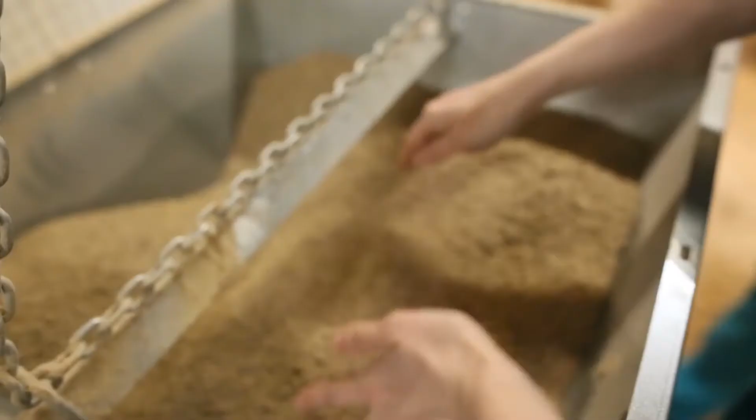Well, some 27 years ago, I was working in the Tumbarumba Batlow area in New South Wales, a well-known fruit growing area with orchards everywhere. I noticed at that time there was a lot of waste. There was waste left on the trees, there was waste on the ground, and there was waste in the processing facilities. I thought at that time I would be able to convert that waste into a poultry feed or a pig feed. Unfortunately, waste and materials like that weren't popular to have recycled at that time.

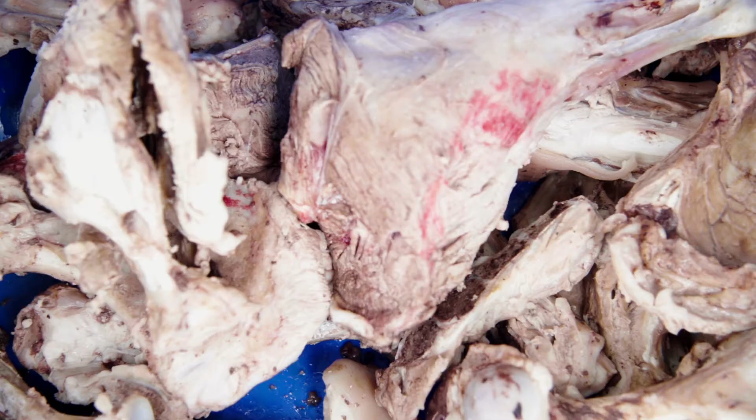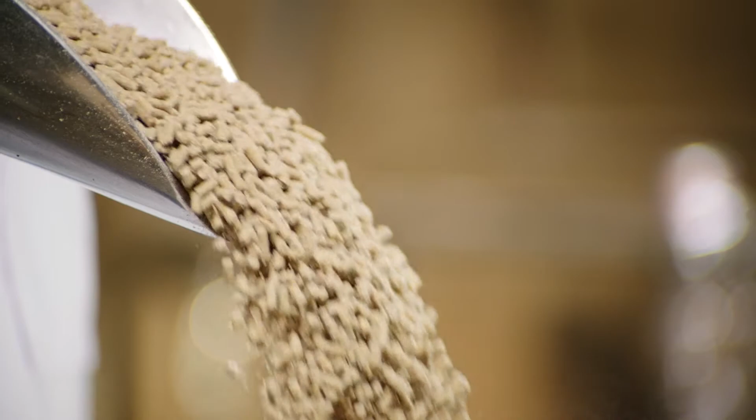27 years later, recycling is a major issue and everyone is interested in recycling. So I was able to expand that original idea 27 years ago into recycling all food waste, taking food waste from hospitals, retirement villages, cafes, restaurants, hotels, everywhere where food waste is produced as a byproduct. In fact, 30% of all food that's produced is never consumed. So the idea is to take that waste and convert it into valuable products such as poultry feed and liquid fertiliser.

How do we turn food waste into food? A pilot facility has been designed to enable the development and fine-tuning of processing various food waste from different sources, such as hospital, educational, and restaurant food waste, fruit and vegetables, or higher protein sources such as meat byproducts. Unless you're part of the solution, you are really part of the problem. And Food Recycle is a company that's going to provide a solution for Australia to overcome the food waste problem and which can be applied globally.

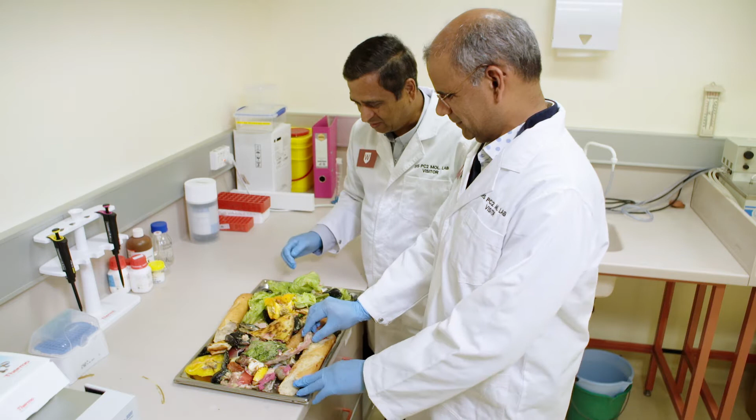Yeah, this particular project, we want to do a small laboratory scale trial before we do the large scale pilot trial. Collecting a few different sources of waste material, we went through the whole process and determined the nutritional value to see whether we can incorporate those into a feed formulation. The process involves collecting the material from different sources, going through a heat treatment to make sure that we destroy all microorganisms, and drying the product in the most efficient way. And then we can grind the product and that becomes a source of feed ingredient, and we can mix in different ratios depending on the final formulation we want.

The full-scale facility will include the key process steps in the pilot facility. The containers are modular in design. Depending on product characteristics, process steps can be interchanged. So my initial skepticism fortunately has turned into optimism and enthusiasm, because I've seen the process in reality. I've seen the science going behind it, I've seen the engineering behind it, and I've seen the intelligence and the expertise that Norm's brought together to be able to bring this to fruition. I really think there is quite a significant opportunity for Food Recycle to become a relevant, valid part of the chicken feed industry.

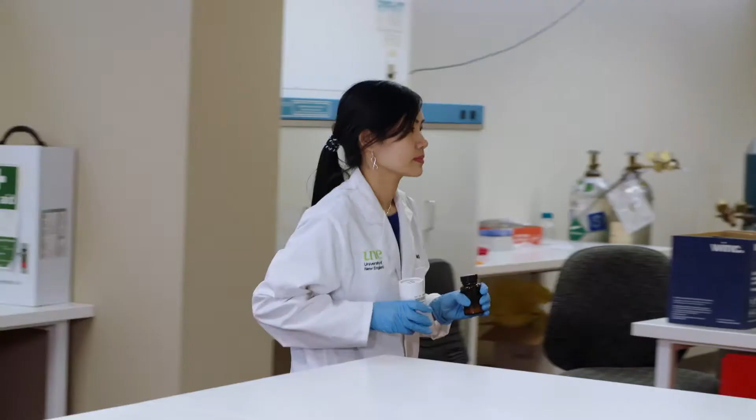A chicken needs about 50 different nutrients, and among those, about half would be trace elements and vitamins, and those are normally added as a vitamin mineral premix to the feed, so we don't really worry too much about those. The ones that we do worry about would be the energy content. Energy comes from carbohydrates and fat, and then the amino acids, which come from protein.

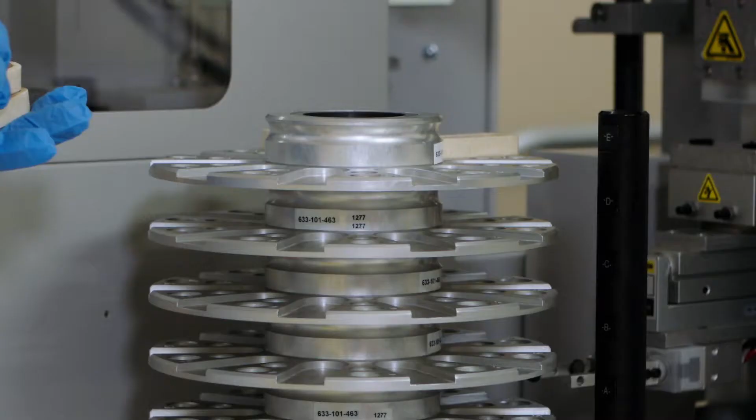Once we have the nutrient analyses completed of all the different waste streams, then we can take that information, put it into a formulation program, and blend them together to make an optimum poultry feed that may require additions of small amounts of other materials. And then we'll also be able to get an idea of the value of each of the different waste streams relative to the price of other ingredients in the marketplace.

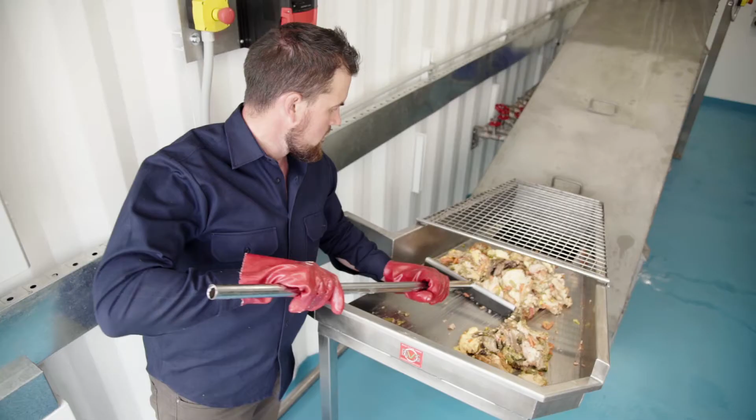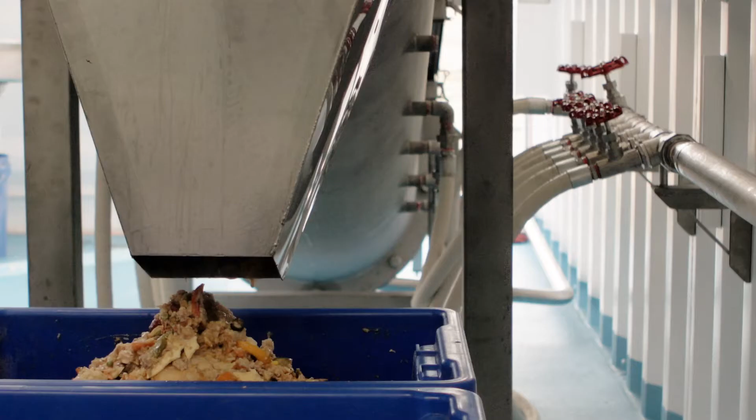Container 1 is the heat treatment step, comprising a direct steam-injected screw conveyor. Killing the microbes is achieved via a combination of time and temperature. Steam is used in this case as microbes are more easily deactivated in wet conditions.

It's a matter of going to all the different state authorities, finding out what their requirements are and making sure the process covers off on all of those. I must say though that with the various biosecurity authorities around the country, there's been a lot of goodwill. People all think that this is a good idea. We still need to do some contaminant monitoring, but we're well down the path to having all that covered.

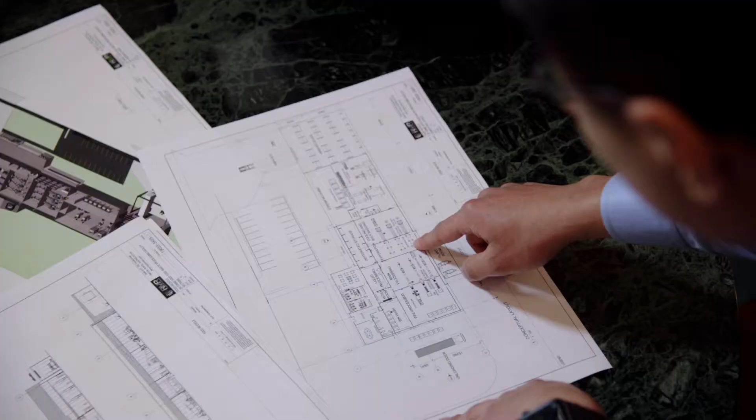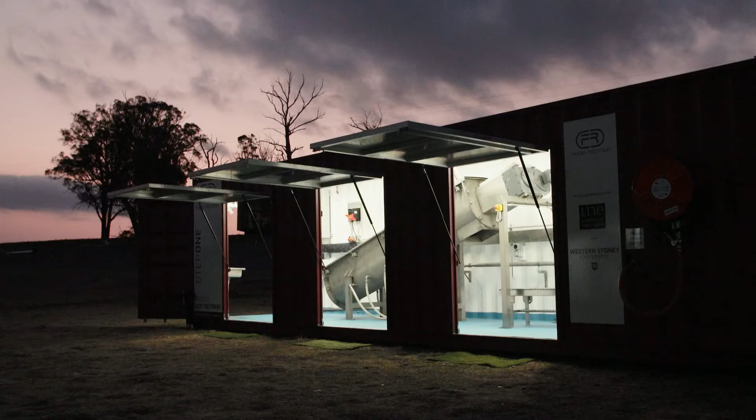RMR process, our business is set up specifically to design and build food manufacturing facilities. When the Food Recycle project came to us, we took a look at what they were trying to achieve and what outcomes they wanted from it. And we just thought it tied beautifully into our own business ethos of sustainability and building food safe, clean design processes, and particularly taking the food waste and converting it into something that's of high value and something that's meaningful and useful. So this project was a perfect fit for our company.

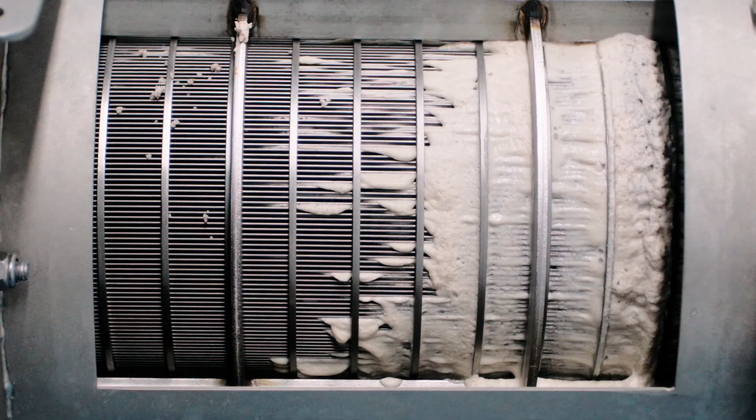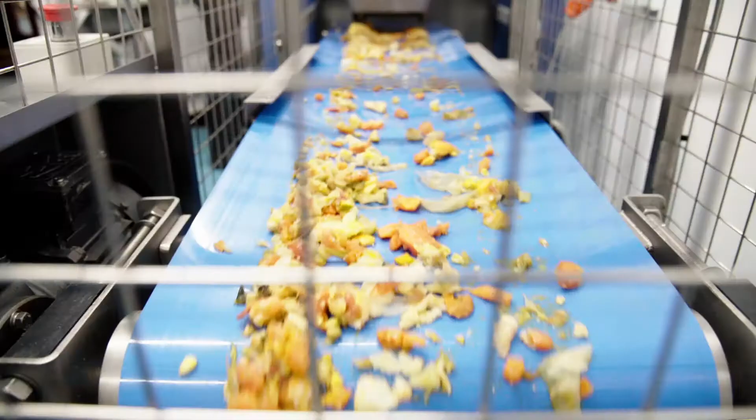Having a lot of years of experience in the pet food industry and pet food manufacturing, we found that could tie in, we could bring a lot of that knowledge, know-how, but also a lot of our networks, people that are experienced in all the different facets and areas of the process steps.

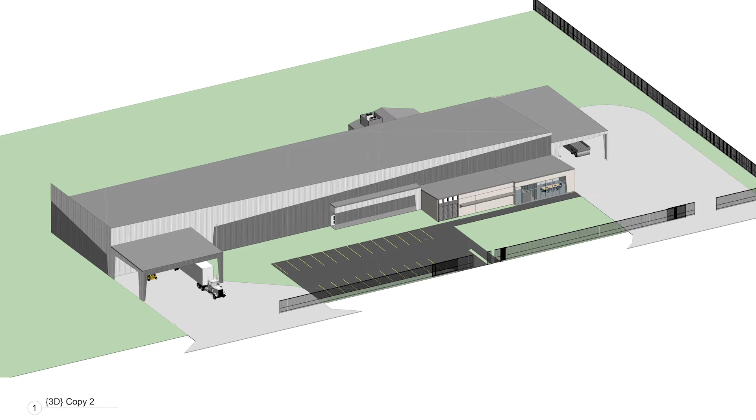Scalability has always been an inherent focus within the process design. What that means is that the throughputs can be increased according to requirements so that the facility is future-proofed, but in a way that makes sense to economies of scale so that capital cost can be protected. So we've designed a full-scale facility that can process up to 3.5 tonnes an hour of food waste at the in-feed, with 3 main processing lines, each capable of processing a variety of food waste streams.

The key is to look at the prospective locations of the facilities and to understand the volumes of waste and the types of waste that are being produced so that we can tailor a solution that makes sense to the location economically.

During my time in government, we looked to support projects that involved innovation, projects that were good for the environment, and projects that delivered economic benefits to our state. And certainly Food Recycle ticks all of those boxes. So it's great to be on the board of this company. I believe this company has enormous potential, not just for Australia, but globally.

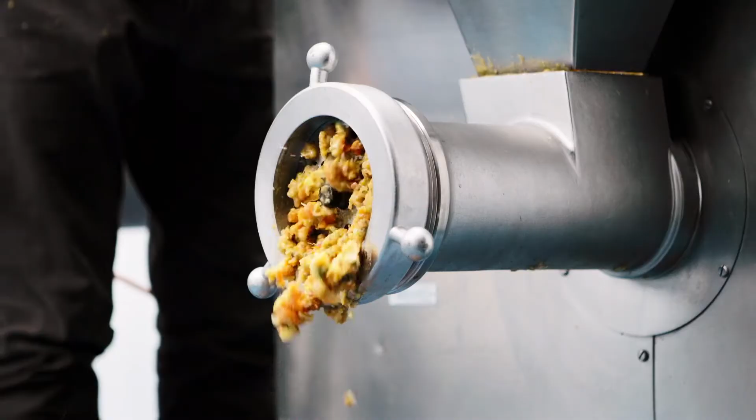Container 2 contains the maceration and dewatering step. Reducing particle size aids in increasing surface area for more efficient dehydration. It also aids heat penetration to the core of the particle.

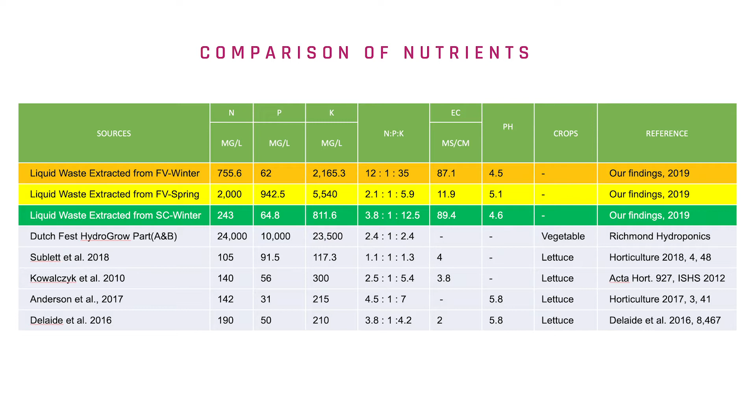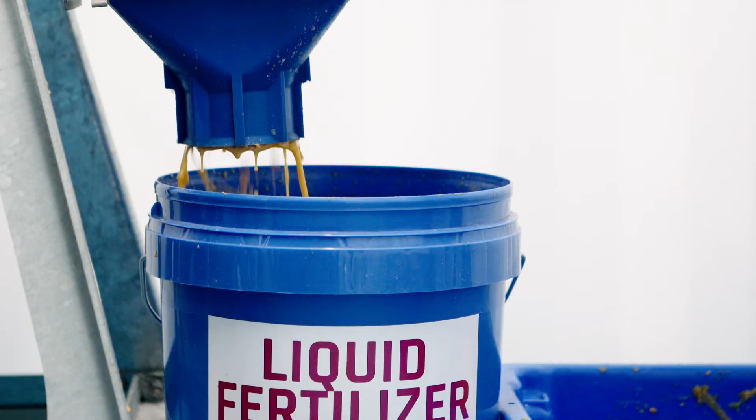When we were working on proof of concept studies to get chicken feed from food waste, we realized that there is a liquid extract which contained high concentrations of nitrogen, phosphorus and potassium. So we realized that this is the added benefit from the process, and we thought this could be a very good value as a fertilizer for plants because it has got all the essential nutrients which are needed for plants' growth.

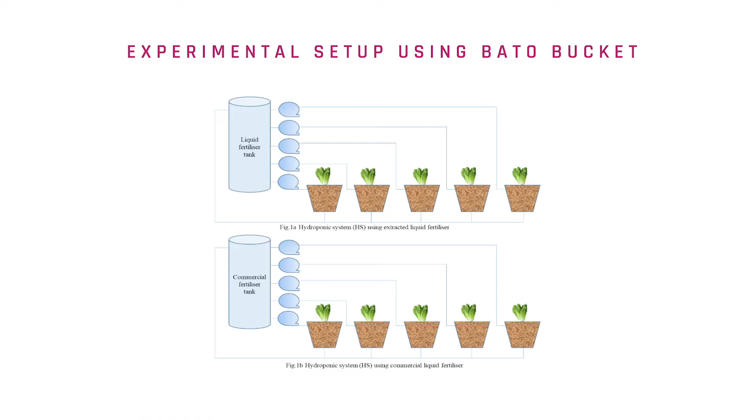So we were working on proof of concept studies to bring the concentrations of all the nutrients in the liquid extract at par with commercial fertilizers. We are doing proof of concept studies to determine the value of this liquid fertilizer for growing hydroponics, lettuce, tomatoes and cucumber.

With the concept around value-adding waste, what's happened is we've been able to refine that waste stream, so we've been able to look at it at a more micro level. Historically, we've just collected all of this and we've called it waste and we've taken it off to the landfill. Now all of a sudden people are seeing value-add in parts of that waste stream, so that's allowed us to break the waste stream up, and to break that waste stream up we have to have multiple chambers in the vehicles and multiple bins to collect the different waste streams.

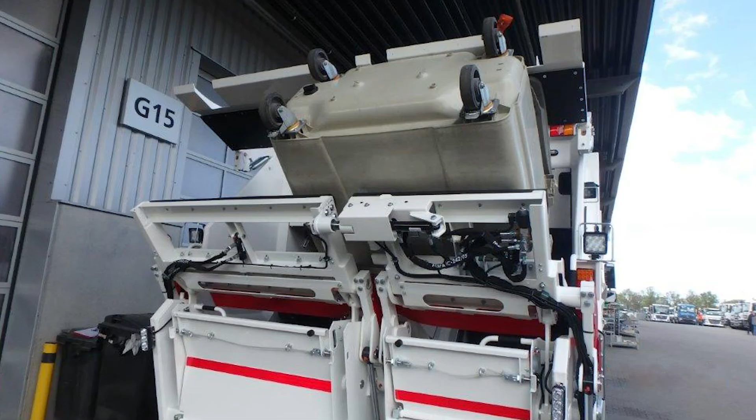We can also turn some of those waste streams that might have historically had a low value, all of a sudden value add them into something like extraction for energy, and then that leads us back to our circular economy and allows us to use waste to drive our vehicles.

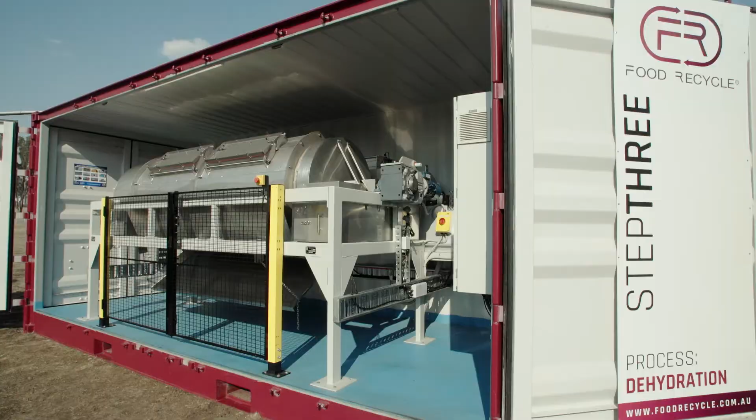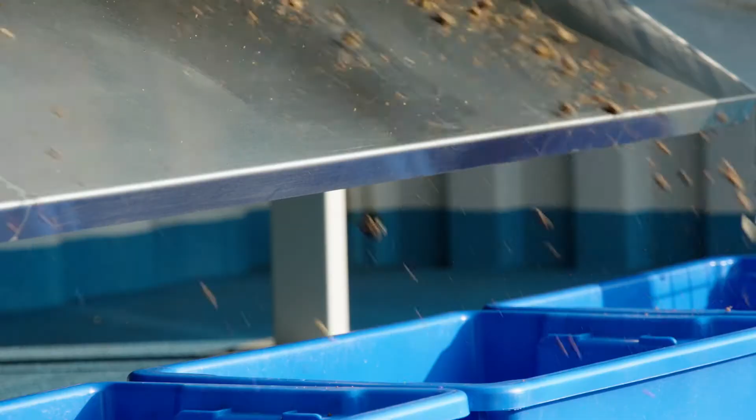Container 3 is the dehydration container. The pilot facility utilises a direct heat rotary drum dryer. Dehydration is important in that it ensures that the crumb generated is shelf stable by removing water activity. The heat applied during dehydration also serves as an additional microbial kill step.

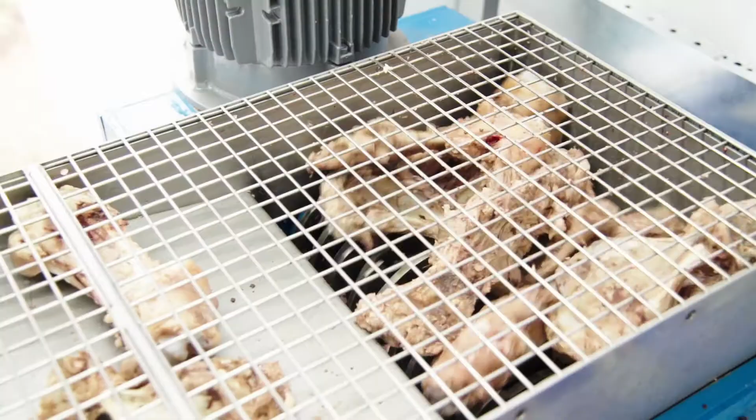So we predominantly use 316 grade stainless steel in the food industry. This is because of its corrosion resistance, its formability, so it is easy to fabricate, easy to weld, and easy to take that weld off to turn it back into a hygienic weld, if you like. We have a strong supply chain in Australia.

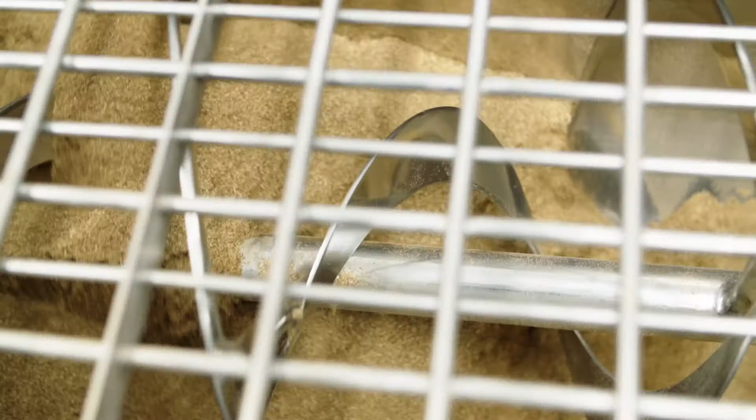It's cleanability, so once you've finished a product run for the day, it's very easy to clean the stainless steel and get it back into a hygienic situation ready for your next run. It's extensively used in Australia, so any food factory in Australia you'll find has got 316 grade stainless steel throughout, and it is very cost efficient. So when you do it once with stainless steel, you do it right and you'll never have to replace it.

We use a steam injection for the biosecurity side of things to kill the bugs and bacteria to enable us to get to that hygienic point.

So we've taken that steam from the carbon pipe through a hygienic filter, then after that process it's all run through stainless steel so that we can't get any impregnation of any contaminants once it's gone through that filter into the product.

RMR Process came to us with a basic design of how they wanted the containers all set up. We then forwarded that design on and actually made more improvements to make it easier in the long run for us to get these things fabricated, and even through the design of how the containers were set up. We had a lot of involvement in that to get this over the line, make it look good, make it functional, and at the end of the day I think the results speak for themselves.

Part of the food recycle process is that the waste needs to be collected daily from the waste providers. We needed to basically design a bin that was suitable for purpose to collect this waste, and part of that is ensuring that the waste produced by the producer doesn't get tampered with or added to between when they put it out on the curb and when it gets collected by the vehicles.

What we ended up with was a double-lidded system that effectively allows the waste provider to lock and unlock and uses a secondary lock for the waste collection vehicle to collect the waste, meaning that it's tamper-proof from any external sources.

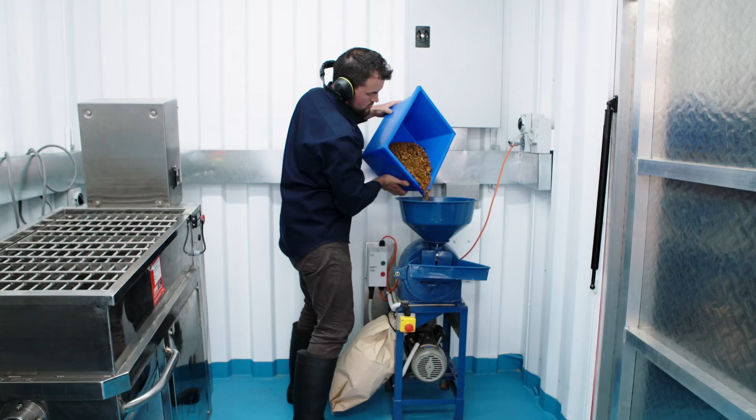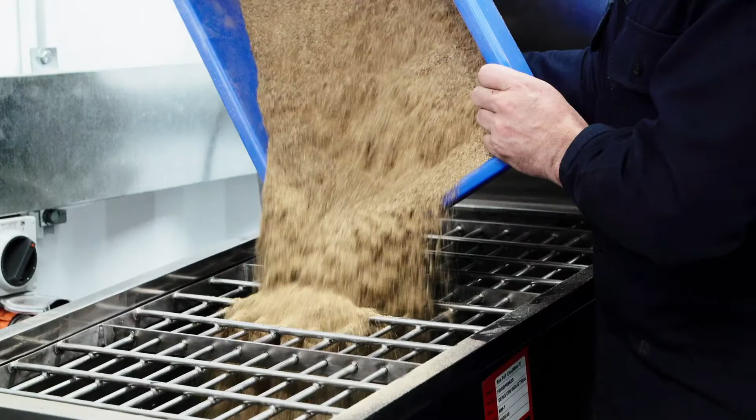Container 4 is accumulation and blending. Here, the dehydrated crumb is passed through a hammer mill and then stored as a shelf-stable fine powder. When the material is ready for blending, the correct proportions of powder waste can be collected according to a feed recipe. The ribbon blender ensures a homogeneous mix. Minor ingredients can also be added at this point to enhance desired nutritional content and to meet the poultry formula feed requirements.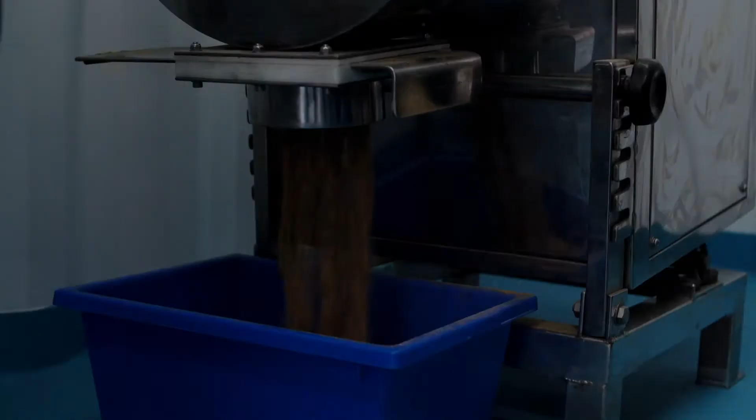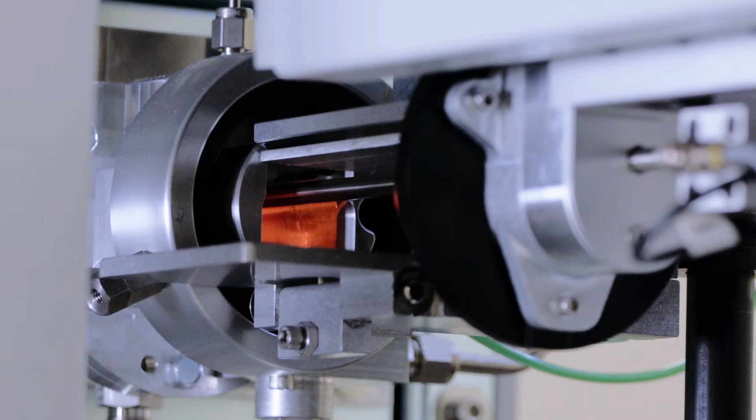Once we blend all the streams together, we will be able to determine what could be deficient, but that's not a problem. We can blend those in to optimize the feed. Part of the process to the final blending of these streams will be the pelleting process. And the pilot plant has a commercial pellet mill that forms the material into a pellet, and most all meat chicken feeds are fed a pelleted diet.

Pelleting, the quality of the pellets is very important because that's a main factor in palatability. And chickens don't have that many taste buds, but they're really after the texture of the feed. So if they can grab a pellet, swallow it, they're happy.

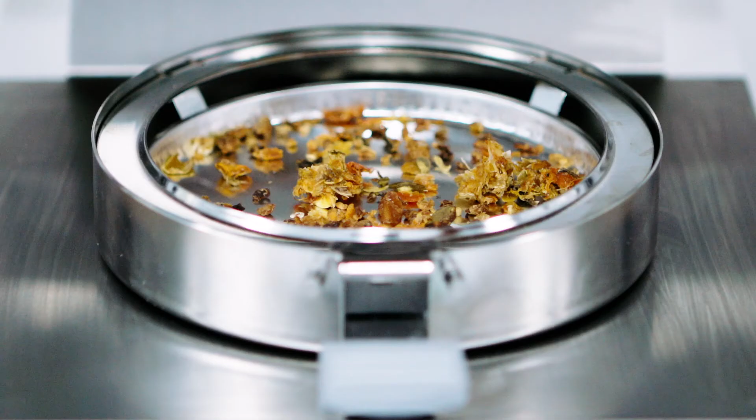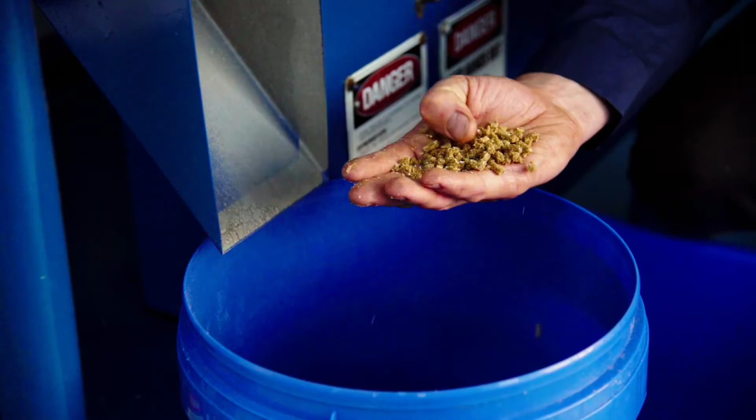Container 5 is the pelletization container. The blended mix can now be fed into the pelletizer to produce the final product after an additional drying step for shelf stability. Food waste that would have previously gone to landfill has now been repurposed and transformed into value-added product.

For me, food recycle, it's very hard to see where the limits are. Actually, today we've seen it's all about collaboration, and we've had some very interesting and challenging questions on scope and size and where we think food might go, but we're just open. We think what we have is a global company potentially with reach across a lot of different industries, such as biosecurity, water recycling, water retention, those sort of things.

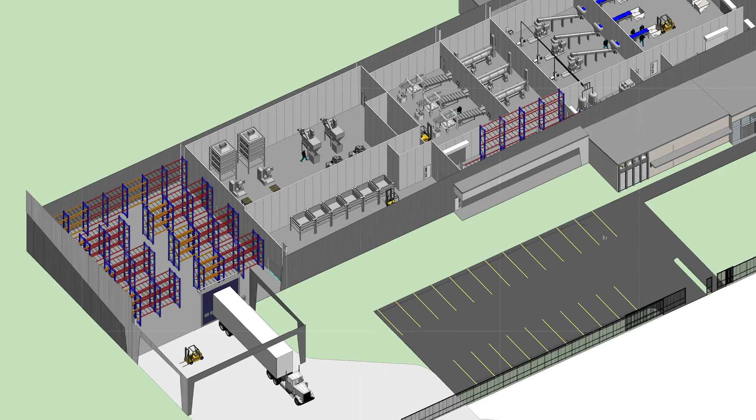This is a global problem. There's food waste everywhere and there's chickens everywhere. So our licensing model allows us to deliver quickly this type of facility globally. Any town with a population of 10, 12 or 15,000 people is capable of having a small facility converting all their food waste into poultry feed and then moving it on to the poultry farms that are generally in their area anyway.

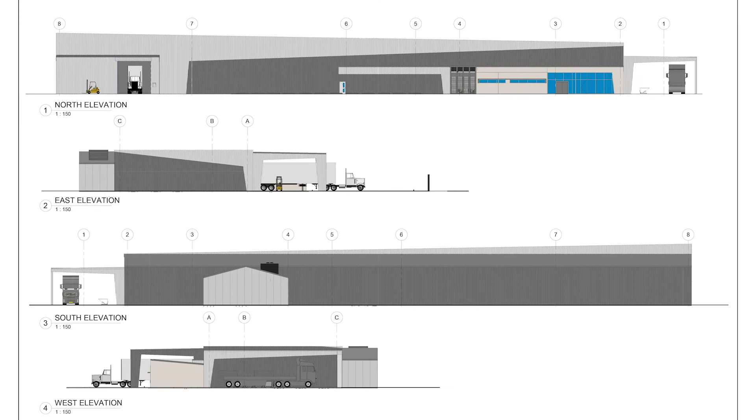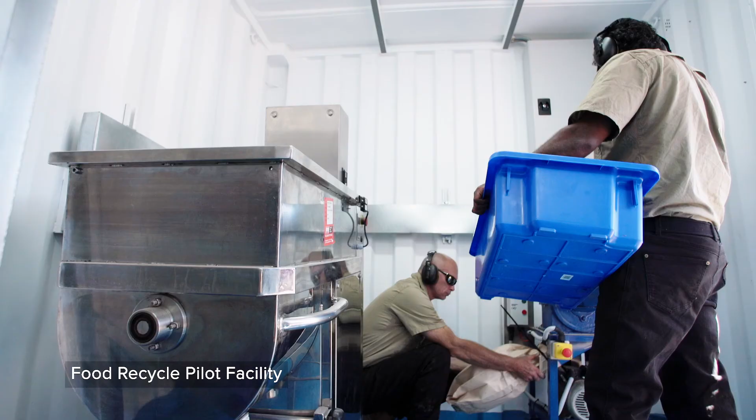The only model that is capable of spreading this out quickly to thousands of locations across the globe and hundreds of locations in Australia is the licensing model that Food Recycle Limited is offering. That license gives those people the opportunity to use the technology for 20 years. We supply the machinery and the equipment under that license so that we know that the standard for all the poultry feed is going to be maintained through the manufacturing process.

We have to ask ourselves the question, where are we going to get the feed to feed the animals that feed us? So we have to get smarter about it. If we collected all the food waste in the world, we couldn't produce enough poultry feed, but we can make a big dent in what's required to come off farmland. We can probably produce 30 to 40% of all the food that's needed for poultry and pigs if we get smart about it and collect that food.